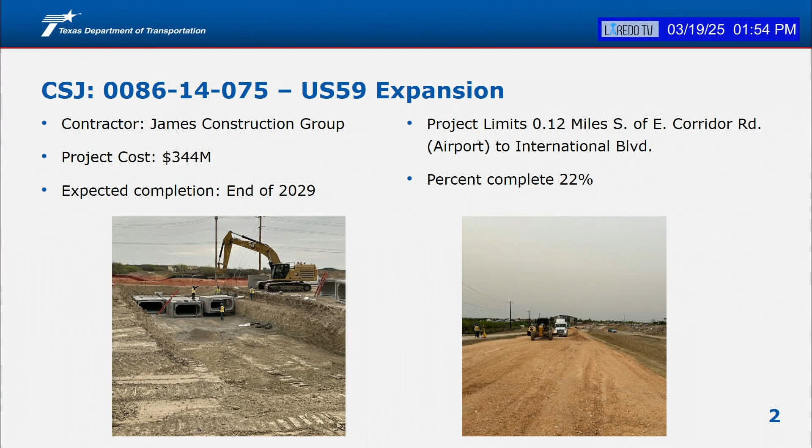We will have movement of traffic in the upcoming months, as we need to cross some of the culverts on Loop 20. We'll be working at night and shifting traffic approximately between Delmar and Shiloh, but all major closures will be happening at night.

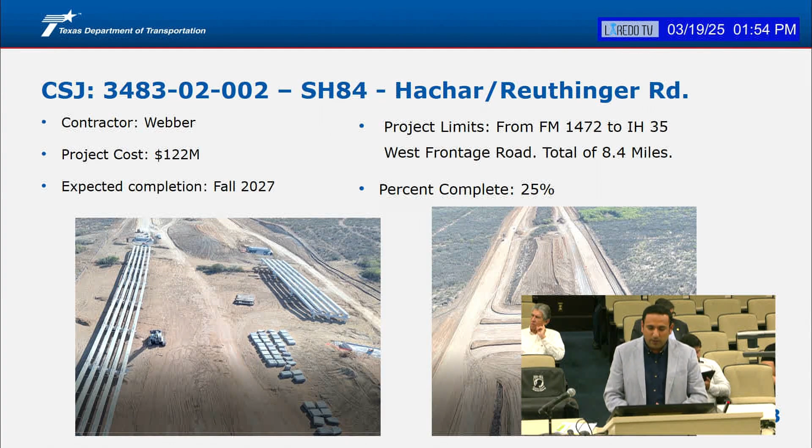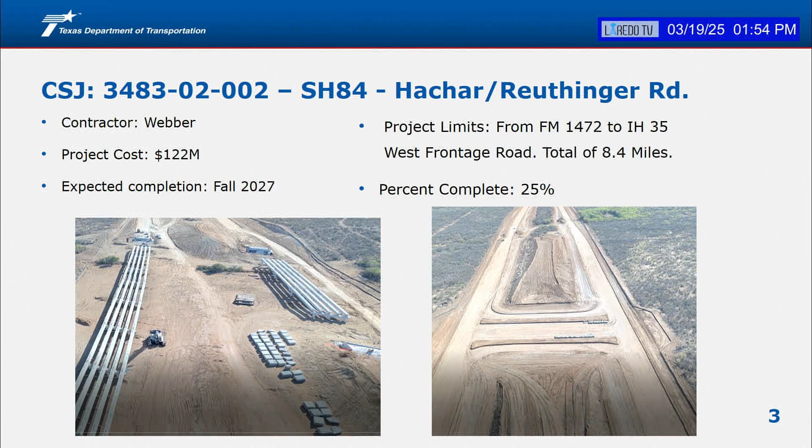SH84 project at Reuthinger Road. Last time I had pictures of trucks delivering beams. Now, the drone picture on the left shows beams already in the caps, and the contractor continues working on the roadway and bridge. On the right, you can see the roadway taking shape along with crossovers of future intersections, and how the subgrade is being prepared, plus progress on the bridges. Investment is 122 million, percent complete around 25%.

359 widening, again, now we are placing base, the picture on your left, that's gonna be for the other side of the roadway. The contractor is delivering base already, working on the roadway already, and more drainage work being done there on the picture on the right. Percent complete, 55%, total investment on that project, $50 million.

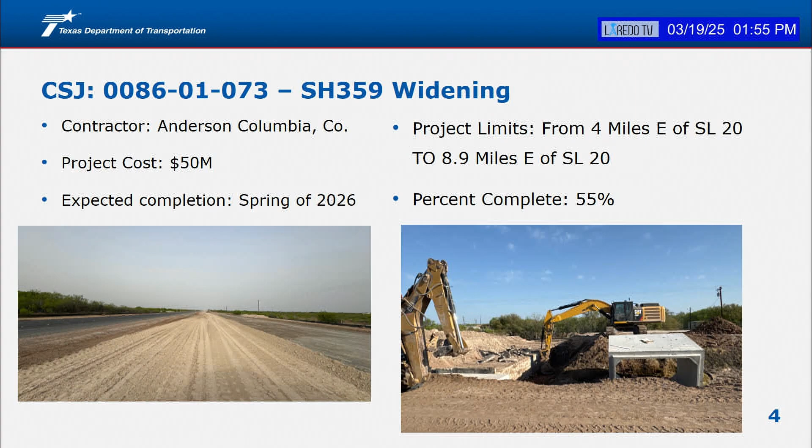Lomas del Sur, not really any updates since the last time I was here. We're scheduled to start in April. I did reach out to our PIO, he's coordinating a groundbreaking. We already discussed some locations, so he's coordinating the groundbreaking for this project, tentatively starting next month in April.

Quick question, sir. Yes, sir. For my mayor. On these overpasses, are we gonna close down Lomas del Sur, the entrance to Lomas del Sur? Are they gonna be shut down, or is there gonna be... I'm just asking.

As we move through the different phases, we're gonna be adjusting the access, but as of now there's no phase where we completely shut down access. Major work on this project, I'm anticipating bridge work, beams, concrete pours. Typically we do that at night, and we're gonna try as much as possible to have access, unless it's an emergency.

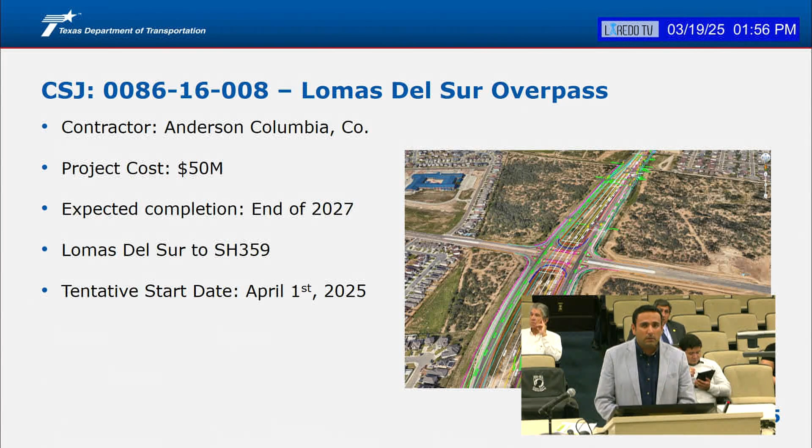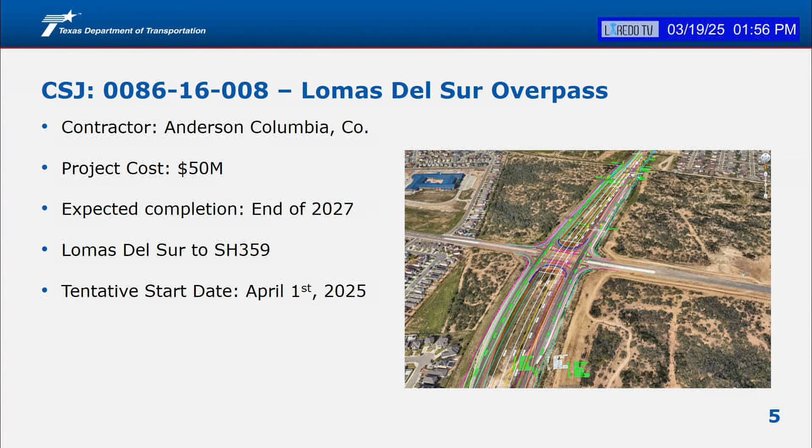But yeah, we don't have phases where we completely shut down the access. Well, you already have the separation, that won't happen for a year, 18 months, no? Most of the work is gonna just be towards the northbound middle, and then we have to reconstruct the intersection, so we're probably gonna be shifting traffic. So they're going northbound first. Yeah.

Next one here, SH 255, again from I-35, 8 miles west, total investment $25 million. We are about at 7%. We just shifted the barrier to extend more structures. We are anticipating starting roadway work probably by the middle of this year, end of June, start of July. As of now, the contractor is just working on the drainage structures to prep the area to hit the road and start doing the widening, the Super 2, and start the actual reconstruction of that roadway.

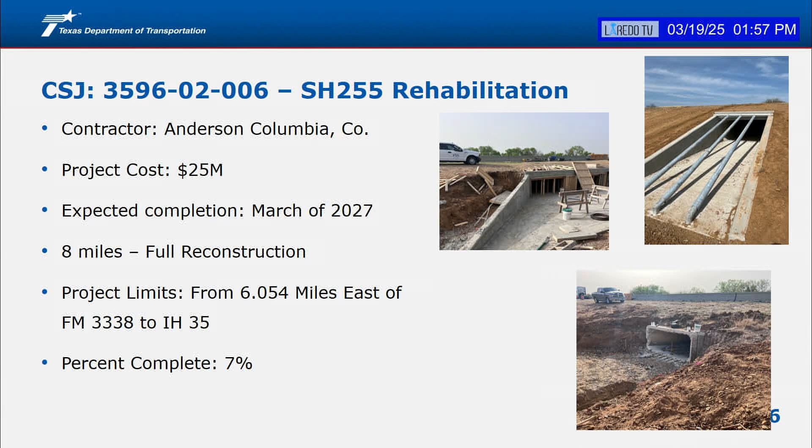So what is the ultimate plan here? We are widening the roadway a little bit, reconstructing, and adding passing lanes. So passing lanes, not a center lane, what? No, we're gonna have what we call the safety buffer in the middle, 3 feet separation, not really the regular striping, but we're not doing a complete separation or divided highway.

What about the existing terminals that are there now? Do they have acceleration, deceleration lanes? Because I know we just did the Botines area and it turned out real nice, but we didn't require all those frontage road agents to put a deceleration lane, so these people are moving into the middle lane to turn right.

So this particular project, like Jose was mentioning, is more for reconstruction, but also just for safety purposes to add those passing lanes intermittently.

The ultimate plan would be basically to have a 4-lane divided highway through this area. That was, you mentioned US 83 there through the Los Botines area, we're also working on that. That's part of the I-27 project. The initial phase is basically building the frontage roads, very similar to what we're doing on the Hachar Reuthinger, where we're building frontage roads with a pretty wide median for the future main lanes. So that's gonna be changing fairly close in proximity.

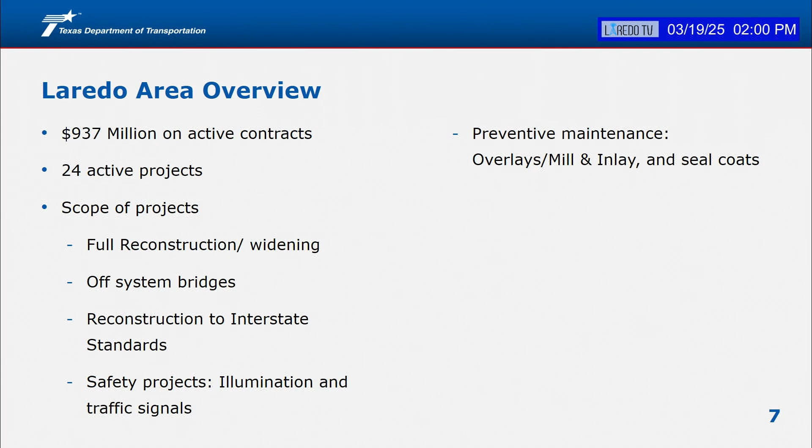Last slide here, just to recap, running all the numbers, we currently have 937 million on active contracts, 24 projects, and this is a variety of scopes: full reconstruction, widening as on 255, some off-system bridges, reconstruction to interstate standards, US 59, safety projects, illumination, traffic signals, and preventive maintenance, overlays, mill and inlays, and seal coats, for a grand total of 937 million for the reporting in March.

And again, last but not least, drive safely through our construction zones. Please help us share this message with the public.

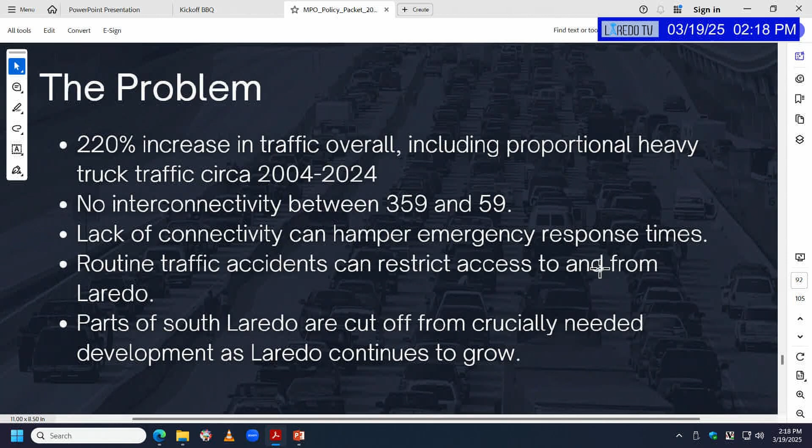As I brought up briefly, routine accidents along these roadways can often disrupt or completely eliminate egress to and from the city of Laredo, at least in an easterly direction. Critically, for South and East Laredo, parts of it right now are isolated from the growth and development that the rest of the city has enjoyed.

As I mentioned, there haven't been connectors developed for this area. However, the county is working on one right now — that connector is working through the Gator Pointe neighborhood. It's a critical infrastructure project, one that this community desperately needs.

However, that Gator Point project is going to be one connector for East Laredo. And when you look at the future infrastructure development plans for that area, you'll find that connector road about 4.5 miles from the current proposed loop.

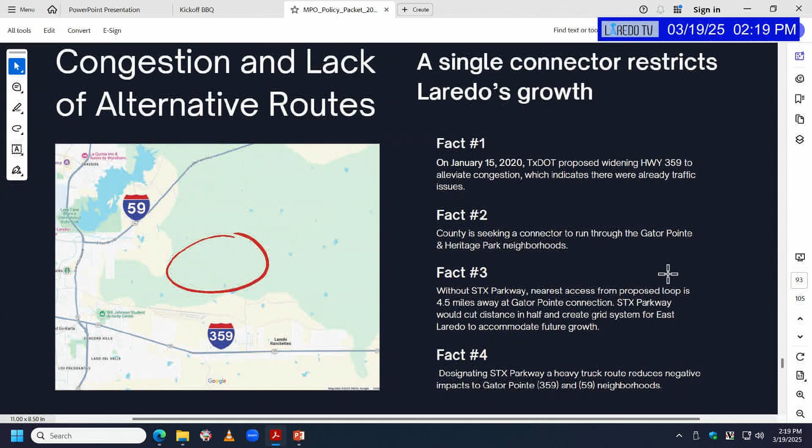Our solution would be a secondary connector route that reduces the distance between the outer loop and another route that connects the two highways. In addition, we propose a roadway that would serve as a designated heavy-duty truck route for the area, making sure to push heavy-duty truck traffic as far east of the city limits as we can, and hopefully reducing the disruption to the Gator Pointe and Heritage Park neighborhoods from the proposed connector that Webb County is currently looking at.

So the roadway here we view as supplemental to the roadway we're proposing, and in combination the two allow the facilitation of traffic movement in a more efficient manner.

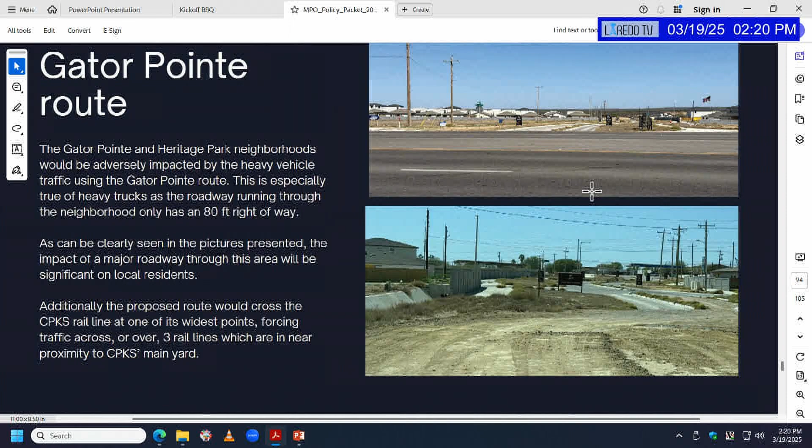This is the roadway — there's a video here that you all will hopefully have access to, and I'll be glad to email it to anybody that needs it. It will show you the route if you actually go through Gator Point. Again, the roadway is going to need to be expanded to accommodate any traffic, no matter what.

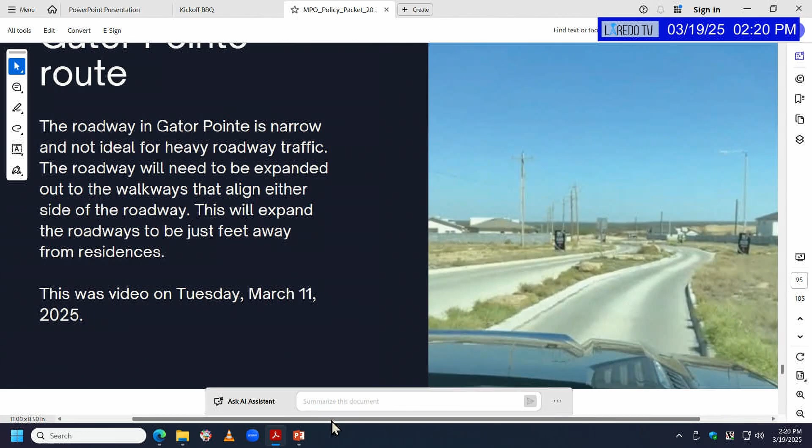But for the expansion to accommodate heavy-duty traffic, there are some issues that this pathway presents. So what we propose is a divide-and-conquer strategy. Looking at the points we've raised, this does not invalidate Gator Point.

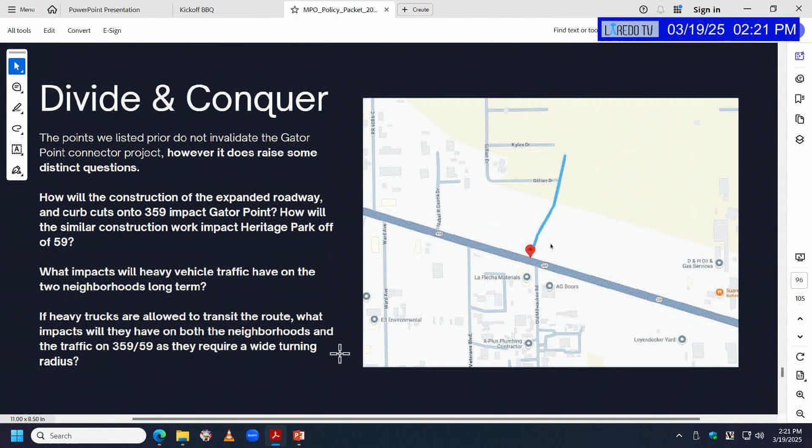Again, I continue to recommend to this committee, as somebody who travels 359 frequently, anything this committee can do to increase mobility in that area is welcome and improved. But again, we have to recognize that one solution may not be one-size-fits-all. What we highlight here is the impact to these neighborhoods, especially from heavy-duty truck and bus traffic on those roads, and how that will impact those neighborhoods.

And our solution that we present to the committee — LECHE has what the region needs.

Again, I continue to mention that we view this as a sister project to Gator Point. These projects are not standalone, they don't exist without each other, and you don't get maximum benefit choosing one or the other. This is not a competition of funds, this is rather a vision for how you expand mobility for the future of Laredo.

The most important thing about what this does for the region is it sets up a grid system for East Laredo, not presented on this map because I didn't have official confirmation. To the west of the South Texas Parkway, approximately 3 miles west, you would have Gator Point, and 1.6 miles east you would have the loop. On the north side you would have 59, in the middle you have Clark, and on the southern edge you would have 359. That sets up an intelligent grid system that allows the movement of traffic, facilitates evacuations or emergencies, and allows that area to experience the growth that the rest of Laredo is enjoying.

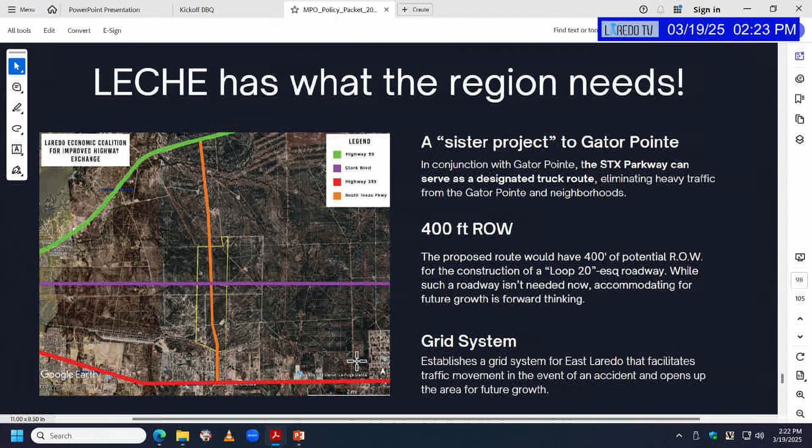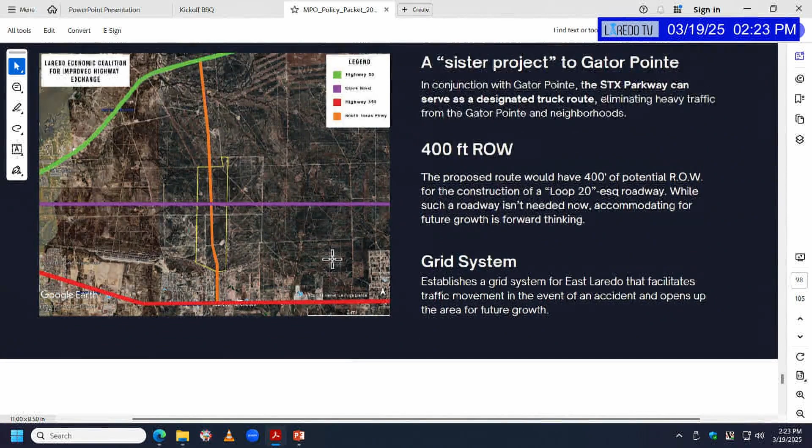James, is that your property, the yellow? Yes, sir. So you've got that on both sides of Clark, I guess? Yes, sir. That is our personal property, not the nonprofit's, that's a different entity. And on the north side, it's all Hurd, right? Yes, sir, and we have had discussions with the Hurds. They are amenable to this plan. I have not gotten official confirmation, so I don't want to imply that, but they certainly are amenable to looking at routes and ways to improve mobility in that area.

And the section from your southern border to 359, is that all Colonia there, or what is that? Yeah, La Blanca, that's the one he's highlighting. That is what that section looks like. Oh, okay, so there is an open tract then? Yes, there is, and this is what that alignment looks like in real life. Is that one owner, or various owners? To my knowledge, Commissioner, there are 3 owners comprising this tract.

Is that the one we're working on now? No, further east, a little bit east of Gator Point. What's the name of the creek there? The road on this side is Welch Road. Yeah, that's it, we have some property in there. Webb County owns some of that open property. And I know there's some flood issues and stuff. Yes, sir, there can be drainage issues, but that would have to be overcome through engineering and road construction. Yes, sir.

All right, and again, this is a view from 359 of that roadway.